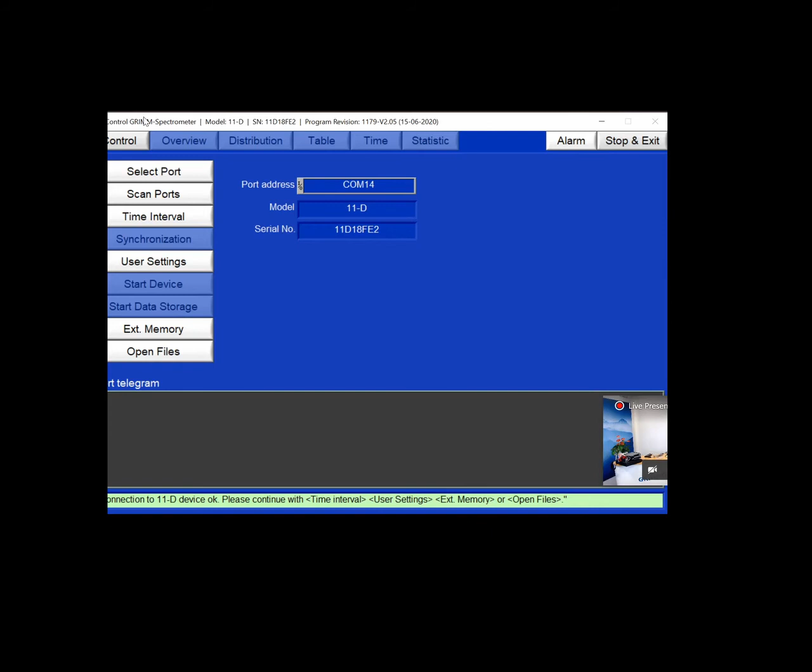and it is also a big advantage in terms of implementing changes in the software system, and we have very nice feedback from customers, and I'm proud to tell you that we have a quite new release of the software where the wide range application, a combination of the GRIMM 11D with the nano SMPS systems from GRIMM, was improved. And there's a second improvement because we managed to stabilize the Bluetooth connections between the device and the Windows system operated by your computers.

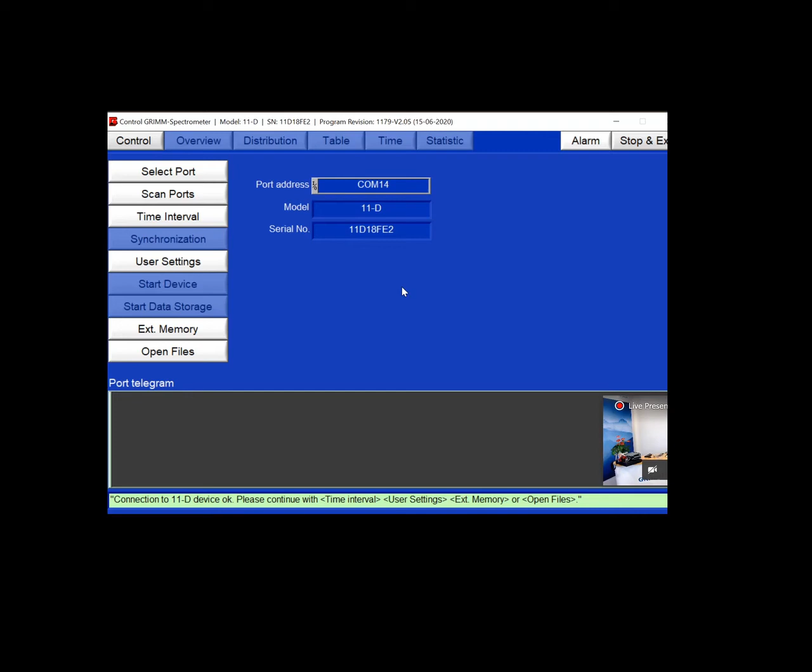Okay, if you open the software, you will realize that it looks very similar to before. So the color concept and the highlighted and gray buttons which you can use or which are blocked. So it is the same as it was before with the other softwares. And I already connected the device with Bluetooth. And if you know the port, you simply can select the port, and select the one, as I did. And if you don't know, you can scan all your ports, but I strongly recommend simply to check the port which is used by your Windows system and device.

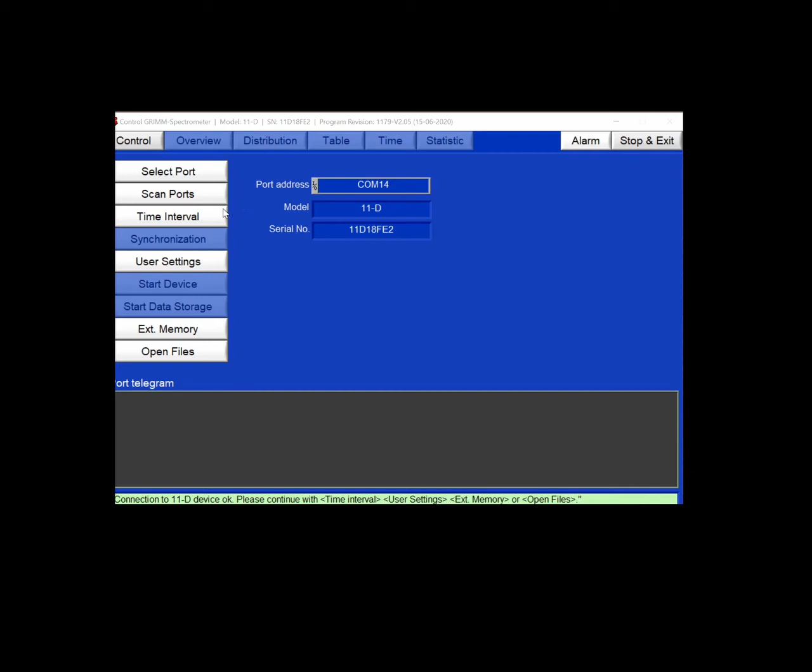Second, you can, as before, change the sampling interval. For example, 6 seconds or 1 minute or 5 minutes or whatever else. And of course, you can also switch to 1 second, as I explained before. So as the former GRIMM devices like the 1108, 1109 and so on could do, the 11D can do this option again.

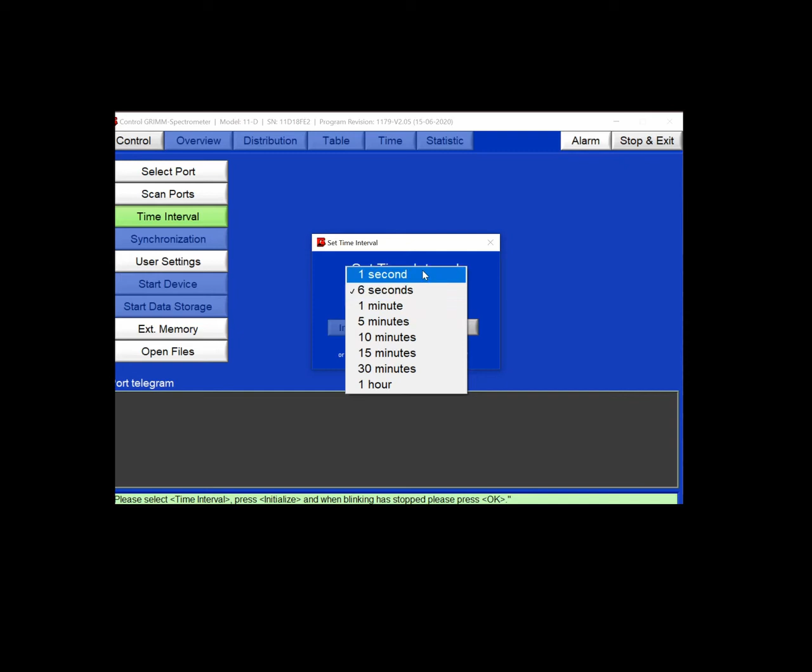If you switch to 1 second mode, you have either the small size range or the bigger size range. And to show you the data today, for this talk, I switched to a 6 second mode, because then we have the whole size range from small particles, 250 nanometers, up to big particles, 35 microns.

By the way, what I forgot to tell you, there's another improvement with the 11D: we switched to a log normal equidistant channel spacing. This is the same concept which we have used all the time already with the nano devices, and now we use this log normal spacing also with the aerosol spectrometer, but you will see it later on when I explain the software.

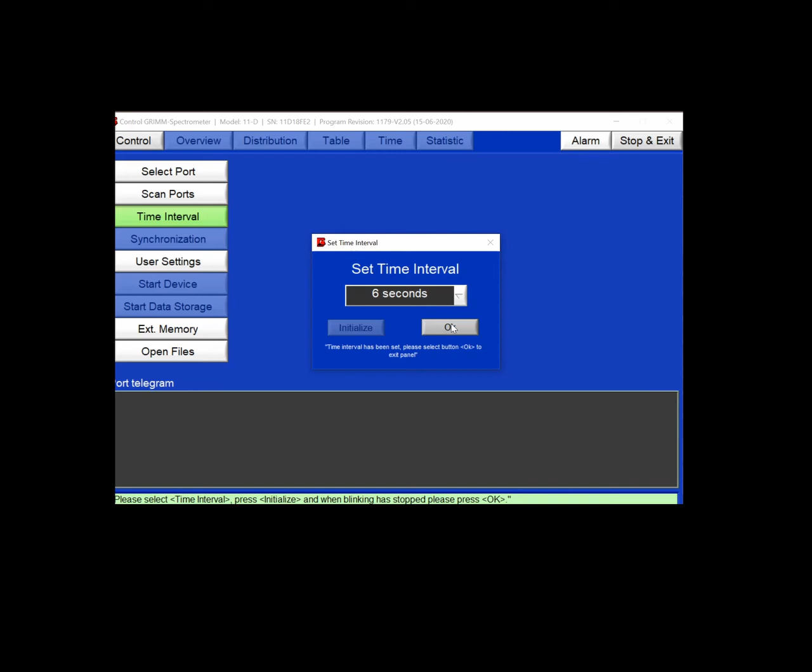Okay, after the sampling interval was selected, you switch to OK, and then you can put in the user settings, and you simply have to select the file path and the file name and some additional information, and then it's fine.

And if this happens, then you made a mistake with your Windows system. This is not necessarily a problem with the GRIMM software, but always a problem with your Windows system. Because if you start the software and you don't have full access to the directories, the software will warn you, because then your data could not be stored on the file path which you have selected.

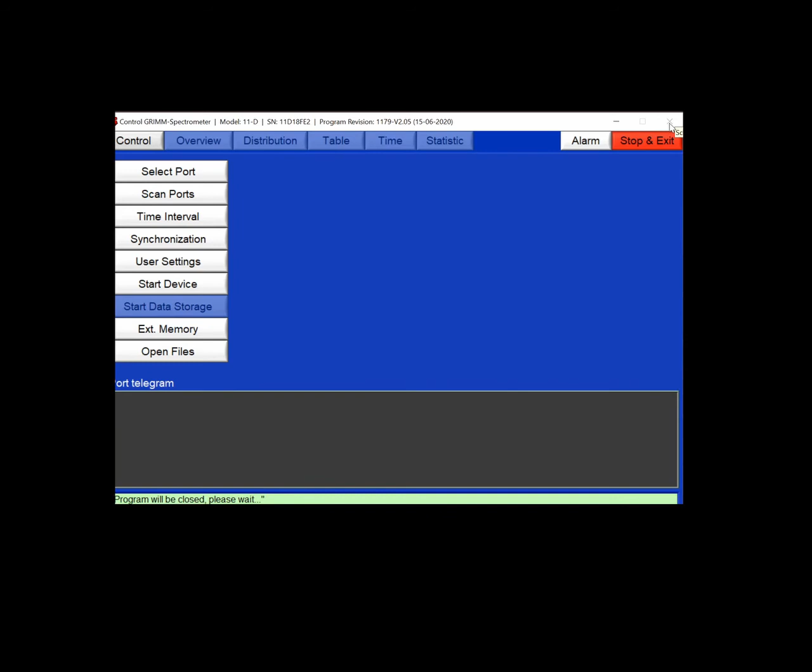And if this occurs, you have to restart the software as an administrator. That's what I will show you now. You stop the software, exit the program, and you start the software with the right click with administrator rights for your selected directory. So again, you select the COM port as before.

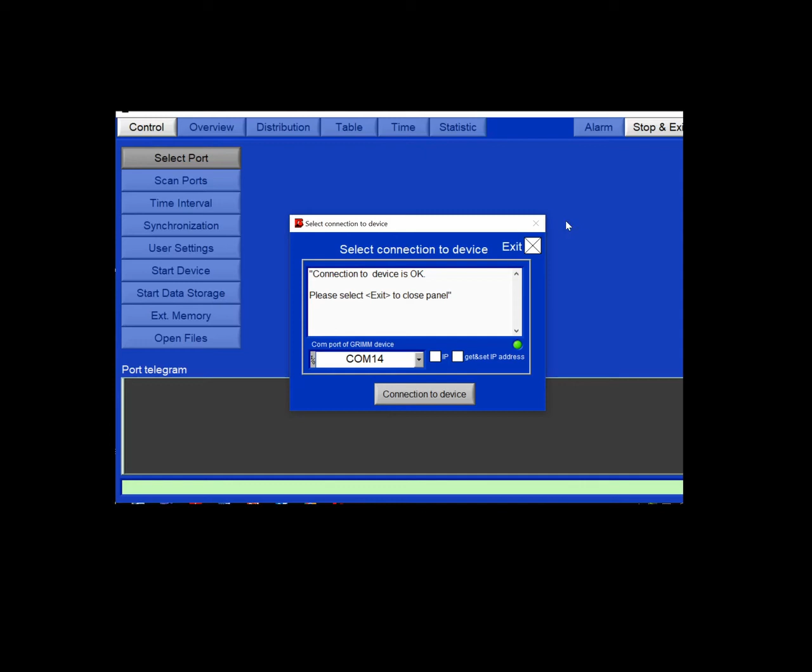And if you connect your device with Bluetooth, you will get 2 clicks, so you will get an audio check. The device LED on the front panel will flash blue. This is the indicator that it is connected with Bluetooth. And after the connection is checked, you will get OK, and you can close this panel. And that's where we have been before.

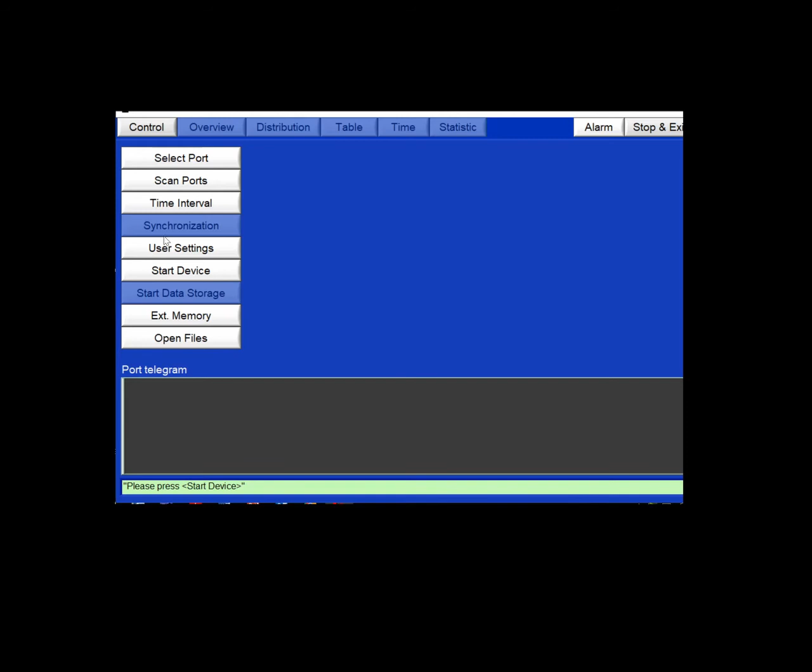But now, if you go to this again, you will see no problems anymore, because you have full rights to use this directory. So, now we can start the device and start the data storage.

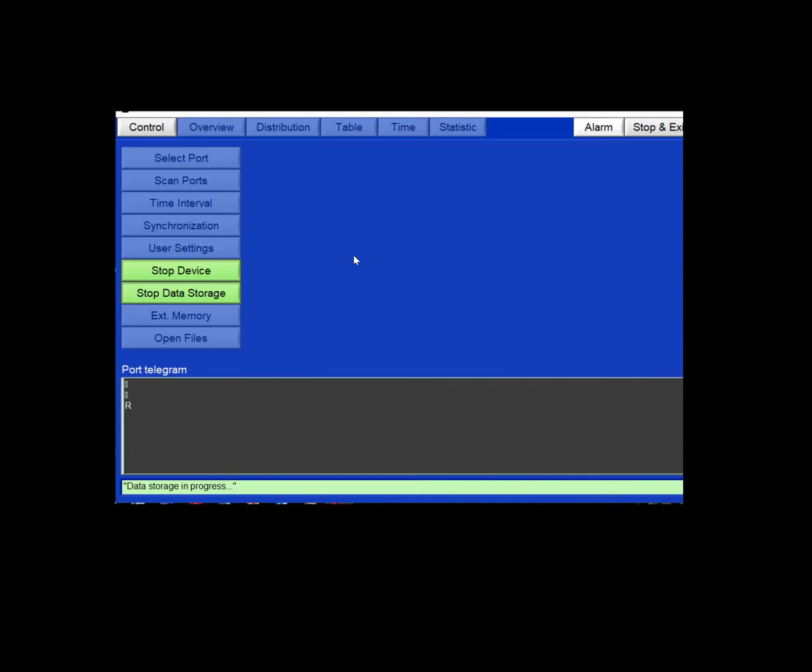By clicking the Start Device button, it takes exactly about 35 seconds for the self-test procedure, where all the optical and pneumatic components are tested. And if there's any problem with either the laser or the photomultiplier or any other component, the GRIMM device will not switch into the measuring mode. So, now I show you what I explained before.

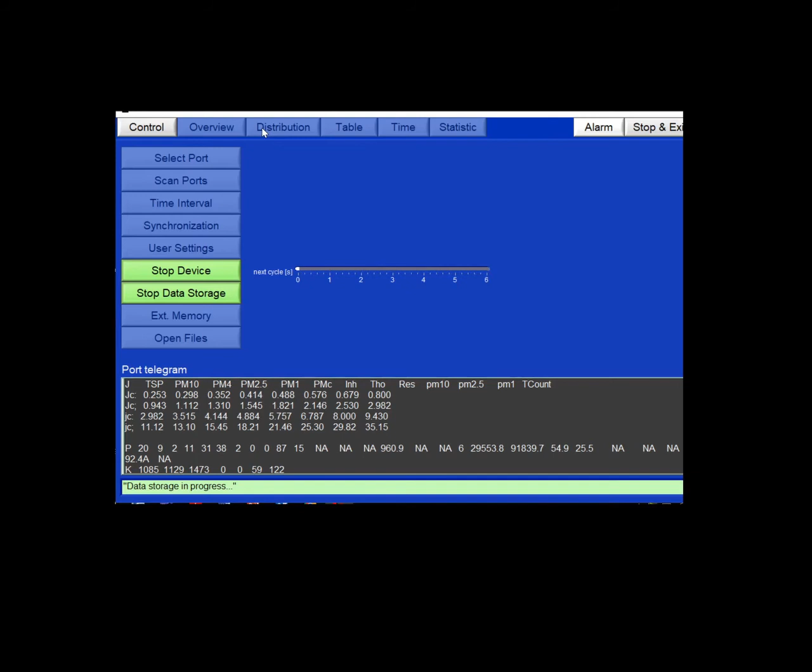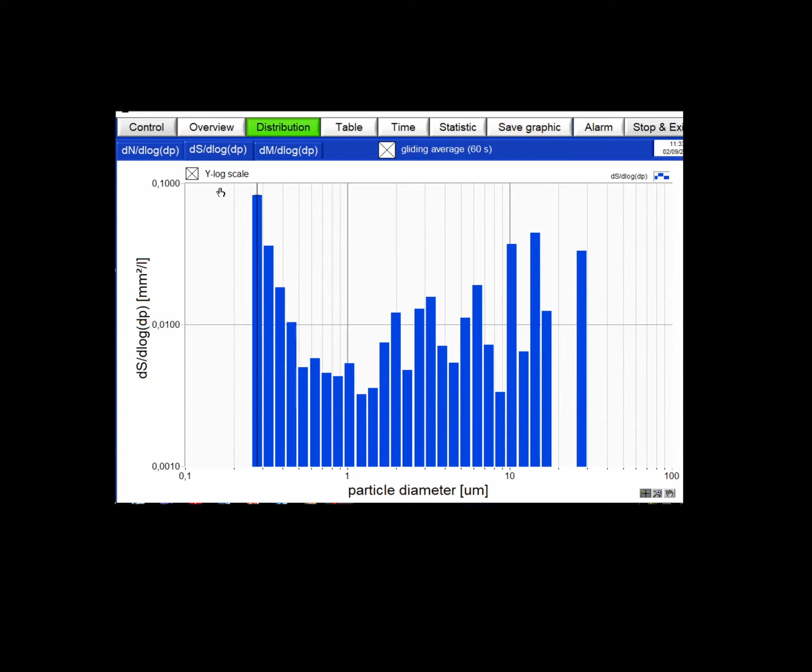These data are measured with the 11D. It's the so-called raw data set. Then the software converts these data, for example, into a particle surface distribution. So here you get the surface of a particle size class, and the software also converts the raw data into the mass distribution. So here you see the particle mass size distribution.

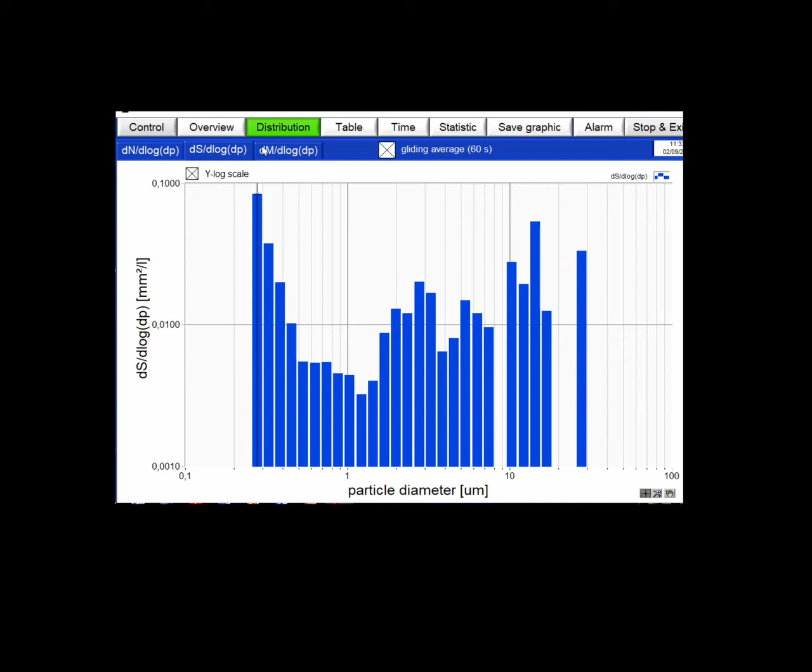With the overview menu, you can easily check all the information I gave you before. You have a total number concentration divided into small and coarse particles. Then you have the 6 mass fractions calculated with the indoor air quality algorithm, and another 6 mass fractions, as I explained before, calculated with the Enviro algorithm.

And of course, beside the overview and distribution, you also can show this data in a table format, either for the counts per channel with the lower particle diameter of a channel and the differential or particle number concentration. And as I explained before, the mass fractions, environmental mass fractions, TSP, PM10, 4, 2.5, 1, coarse, and inhalable, thoracic, respirable, and we have to scroll to the right part, the IAQ mass fractions, PM10, PM2.5, and PM1.

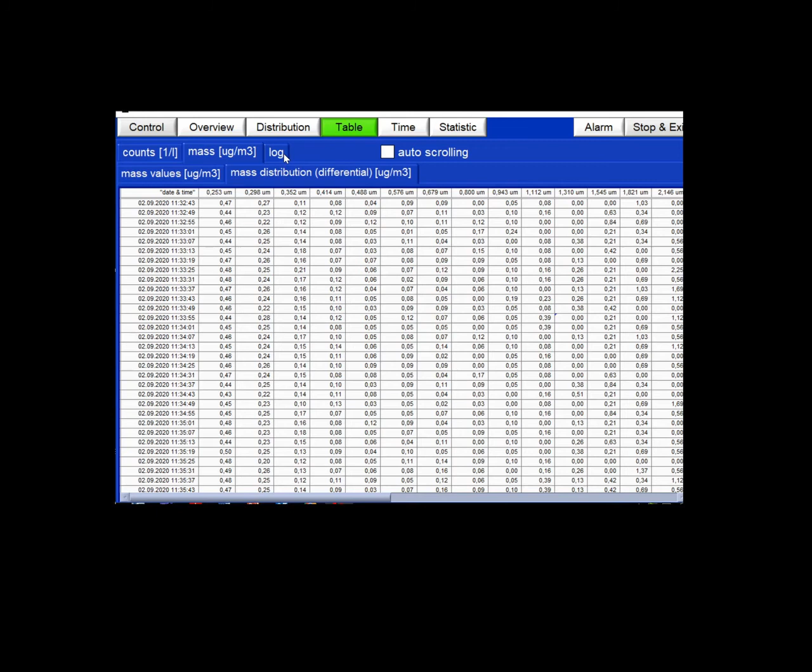In the log file, you have additional information like error codes or location number and the data from the external sensors. And what is maybe very interesting for most people is this time plot menu. In the time plot, you have again a lot of different options for what you want to display. Let's start with the raw data, with the counts.

So you can select different channels by clicking on the diameter. So this is again the lower diameter of a channel, and you can select up to 6 channels, I think. And the data are updated according to the sampling interval you have selected. In this case, every 6 seconds.

And you can easily switch from the counts per size channel to the mass per size channel. And so only by using this slider here, you switch from the number concentration, particles per liter, to the mass concentrations, microgram per meter cube.

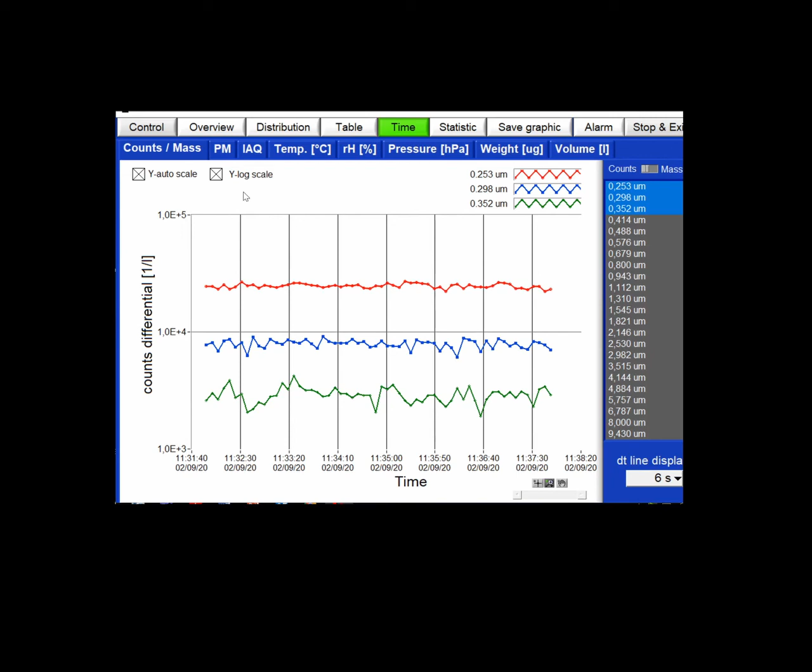In the next menu, you can display the calculated mass fractions. And again, like for the overview option, you have one window for the environmental PM fractions. I switch to the log scale, then you can see that they are not identical, not at all. And you can mark or unmark the 6 values by changing the colors or by unmarking the line.

And you can switch also to the other 6 dust mass fractions, the inhalable, thoracic, respirable, occupational fractions, or the other PM data. And as you can see, for example, comparing here the green, magenta, and gray line, which is something about 10 microgram per meter cube and about 3 to 5 microgram per meter cube, these PM data are not identical with the environmental PM data. This is very important.

So beside those 3 values, counts and mass, PM values for the enviro algorithm, IAQ values for the occupational algorithm, you also can display additional information if you connect the sensors for temperature, humidity, the internal pressure sensor, or other information like the total weight of the filter or the measurement volume from your measurement.

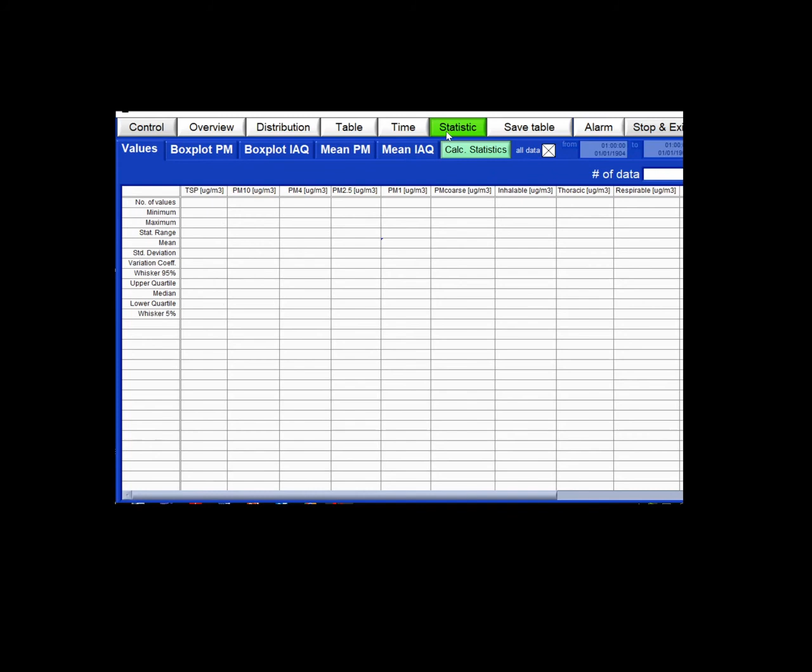Another menu, which is still in the software and which was implemented several years ago, is the statistic window. You will get here key values of each measurement with the number of data sets, with the minimum and maximum value, the range, a mean value, and other values we use for the whisker plots.

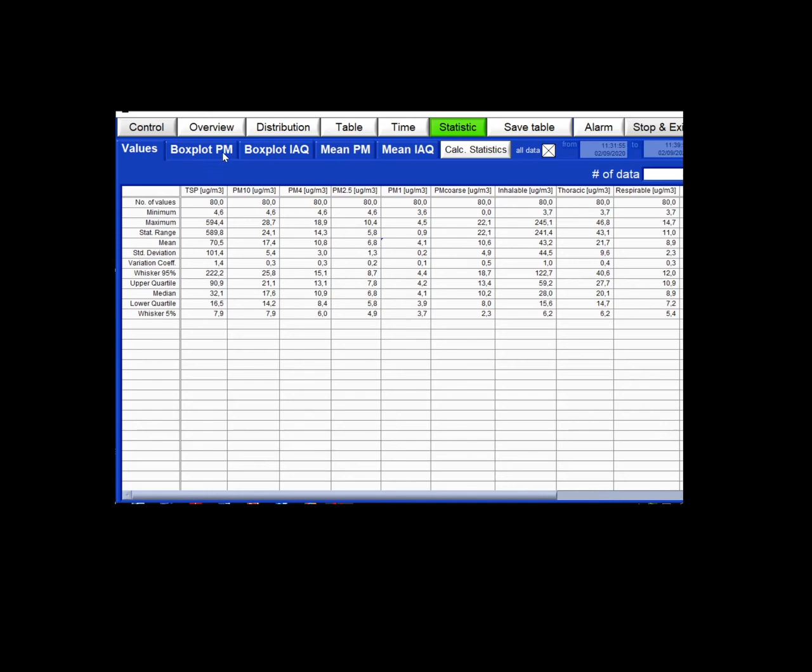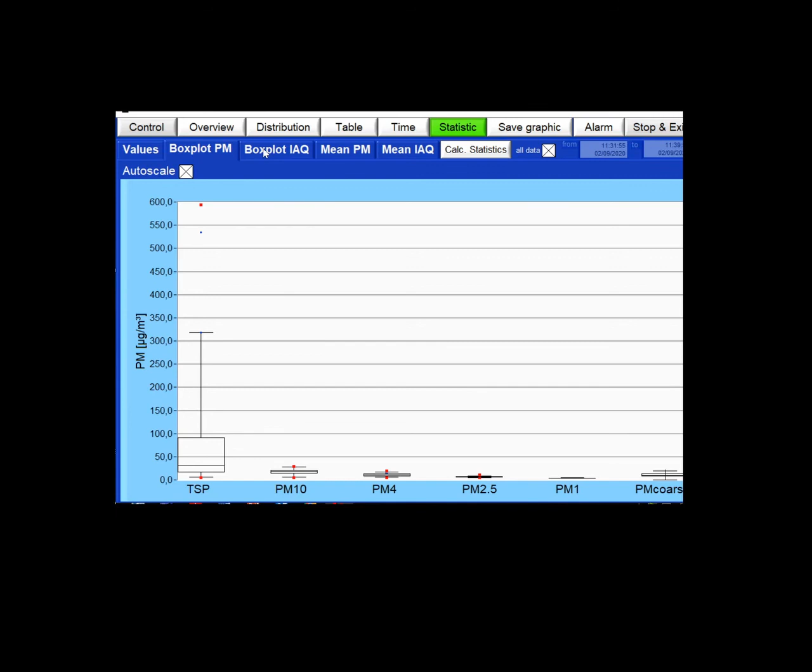And if I switch to the whisker or box plots, you can see the values, and 50% of all the data are within this box. The red dot is the maximum value or the minimum value, and the whiskers indicate the upper 25% of the values or the lower 25% of the values. And these whisker plots you can use for the environmental mass values, but also for the occupational mass.

And if such a whisker plot is symmetrical, then you have a normal distribution of your aerosol, or, let's say, an unaffected aerosol distribution. So this gives you a very quick overview of the aerosol you measure.

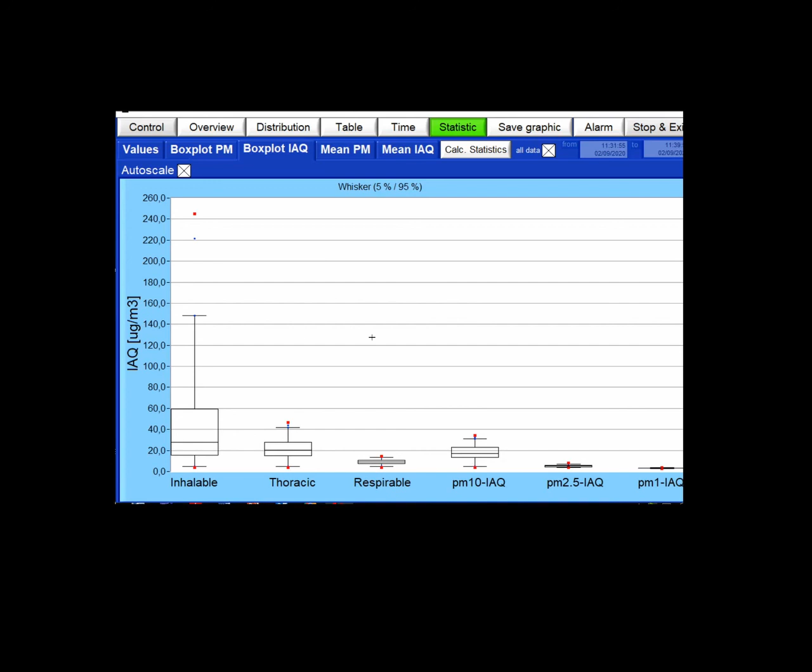Also integrated in the statistic option is the mean value slider for the PM values and the occupational mass fractions, where we simply calculate the arithmetic mean value of this measurement number.

And what's also really nice with this software, you can switch from all data to a certain interval, for example. So if you measured for a certain time, and you are interested, for example, in the first half of the data only, you can calculate these values not with the total number of data, but simply, for example, you can switch here to another time, and then you have to calculate this data, and the data are different.

So this software gives you also the possibility for a very quick data analysis online at your sampling site in the field. And I will show you now again an option which is unique for the GRIMM aerosol spectrometer, because we measure very small particles but also big particles.

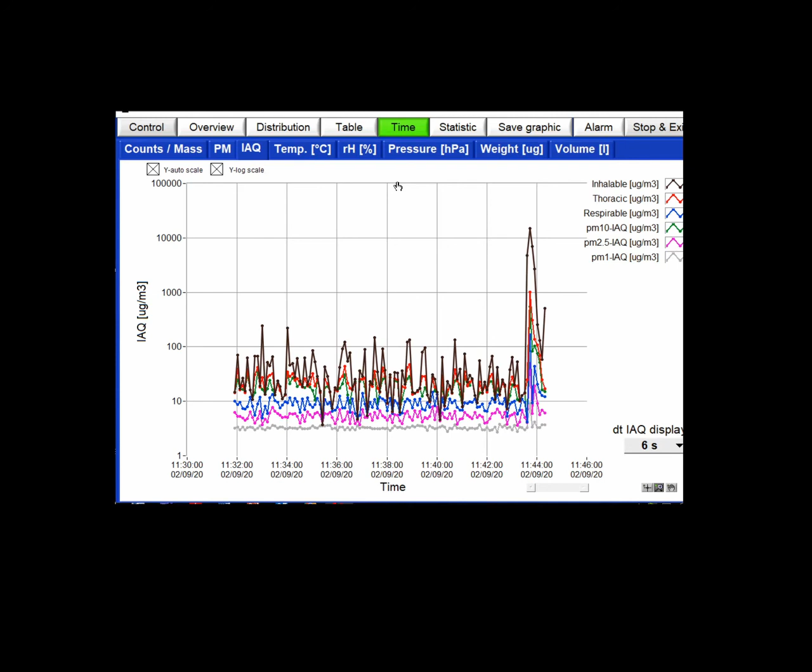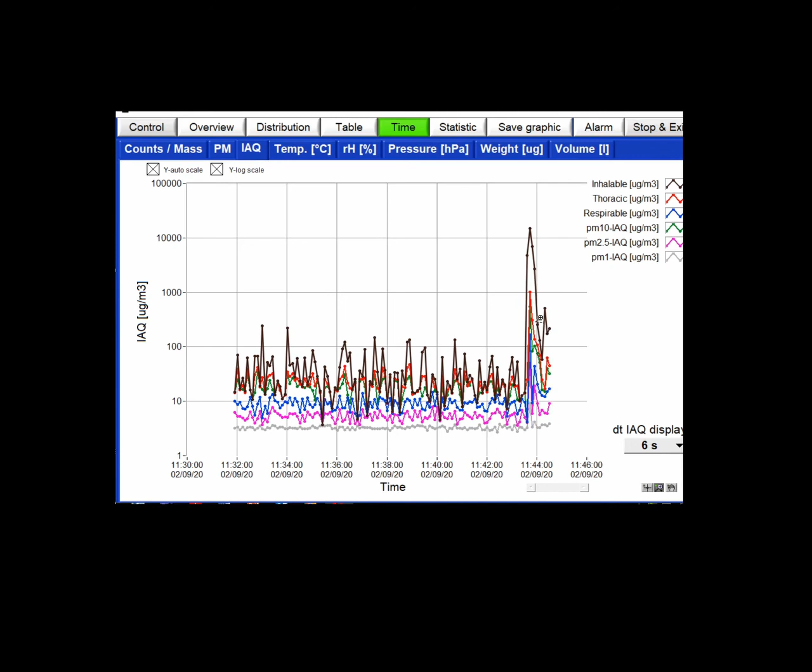But as I explained to you, I generated big particles only, so the increase is in the inhalable and thoracic fractions mainly, but it is not so strong, for example, in the PM1 fraction or in the respirable fraction.

And a completely different effect you can show if you don't generate coarse particles, but if you generate fine particles. So, where do fine particles come from? Fine particles come from combustion aerosols. And if I generate particles by combustion, we will get a completely different effect. And the GRIMM is able to differentiate where the particles come from because we have 31 size channels.

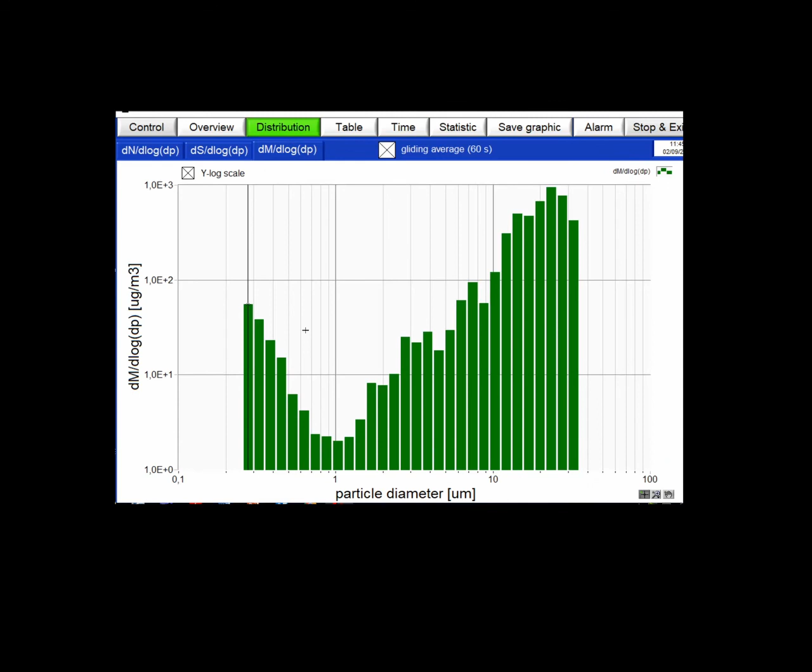If I go back to the distribution now, we have also an increase for the small particle fractions here on the left side. And if you go to the time plot, you will see that now also the small mass fractions, like here magenta, the PM2.5, increase really strongly. And I was a little careful in generating particles, but I will do some more particles and make a much stronger effect now.

And this is also something where you can prove if your device is a real aerosol spectrometer or a low budget sensor only. Because if you have an aerosol spectrometer, the device should be able to differentiate between the different particle sizes and mass fractions. So we do not calculate, let's say, from a PM10 value to a PM2.5 value, but all the mass fractions we measure are calculated on the basis of a measured number size distribution.

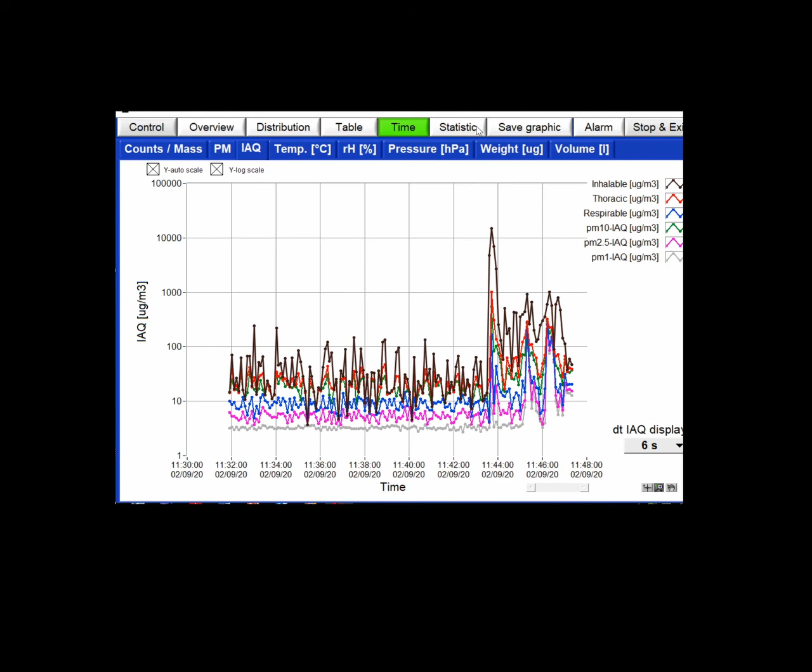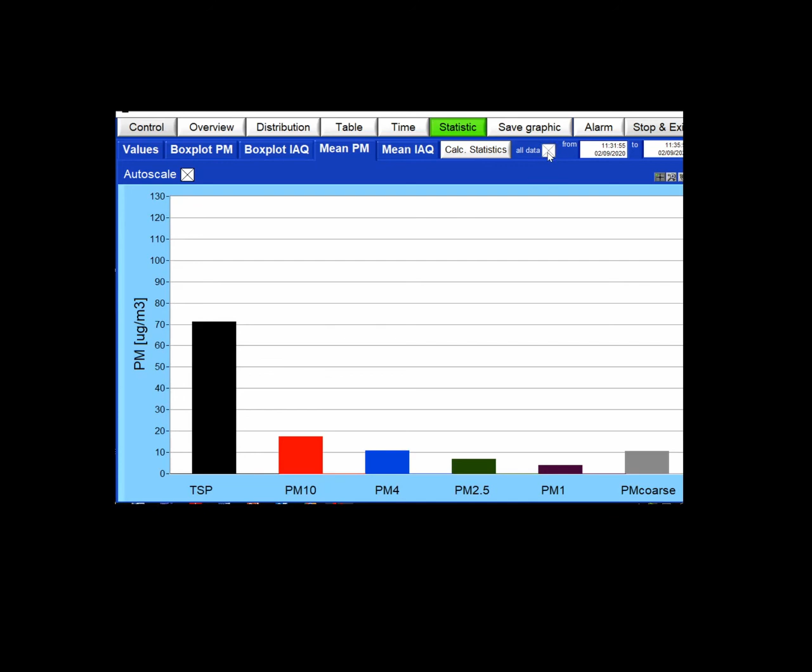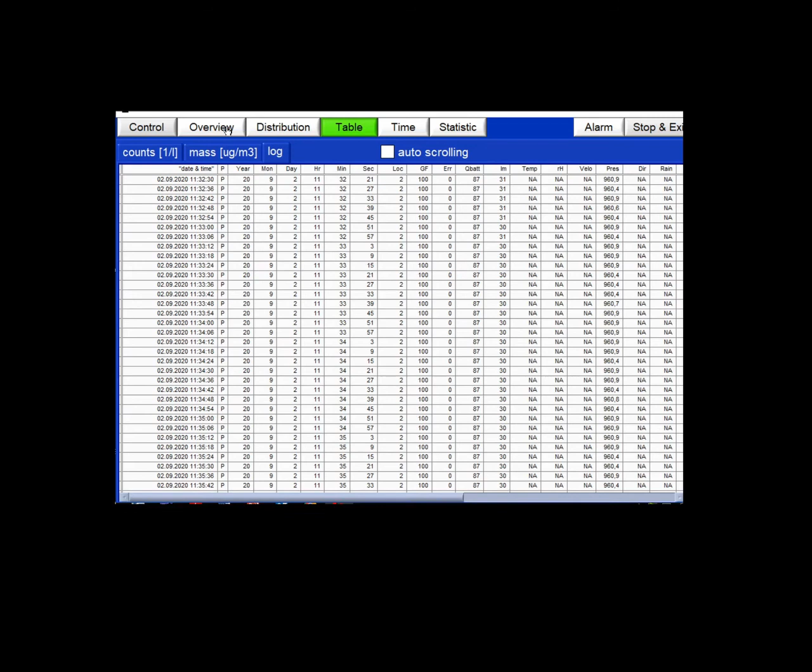And again, this is an option you can also analyze immediately with the box plot chart or with the mean chart graphs if you switch to the time frame which is interesting for you. Of course, these options are not completely new, but we included the successful options from the former software version 11.7.8 to this 11.7.9.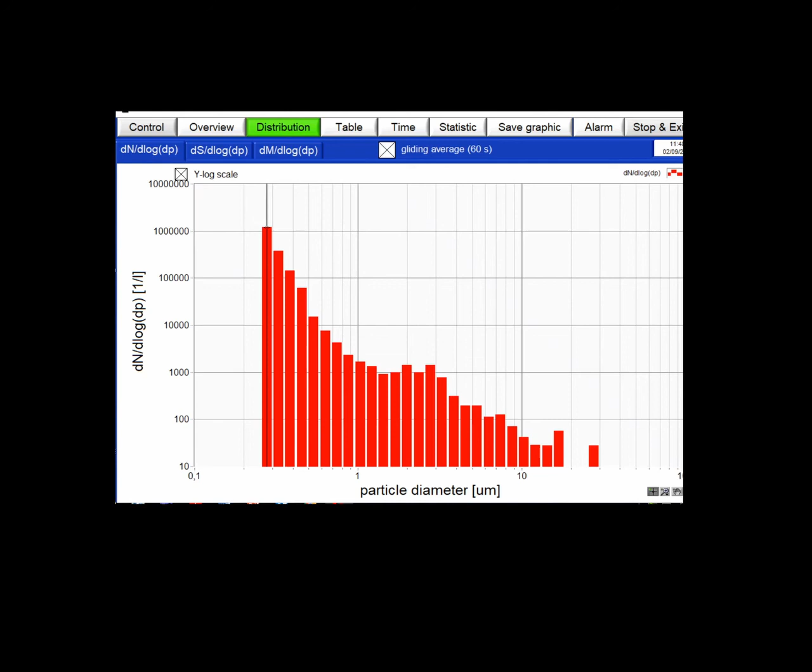And so now by explaining to you the new features and advantages of the 11D, the scope of delivery, the changes in the handling, and some first brief impressions from the software use, I'm through with my planned content.